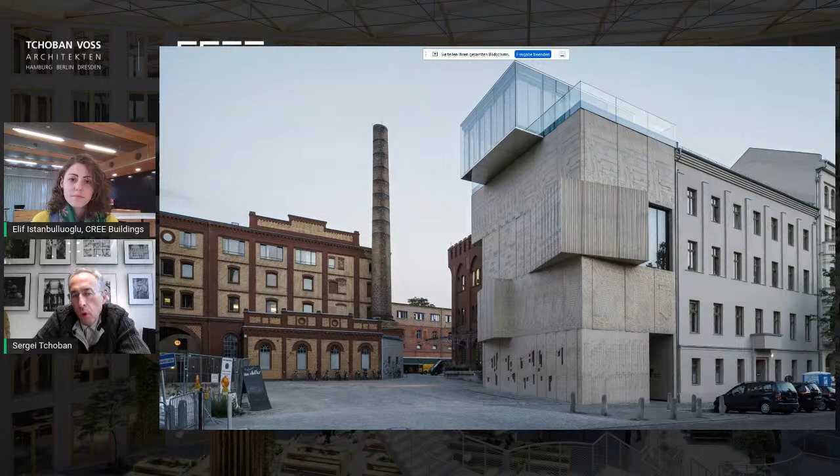But before that, I'd like to introduce some other buildings, maybe you know one or other of them. For example, the nhow Hotel along the Spree River - the hotel is already maybe 10 years old and still quite an interesting, iconic building along the Spree in the east part. On the other side is a museum of architectural drawing, small but quite nice, with a load-bearing concrete structure and matrices made of surfaces with drawings, the roots of drawings, as you can see also inside. The museum is dedicated to architectural drawing and architectural illustration.

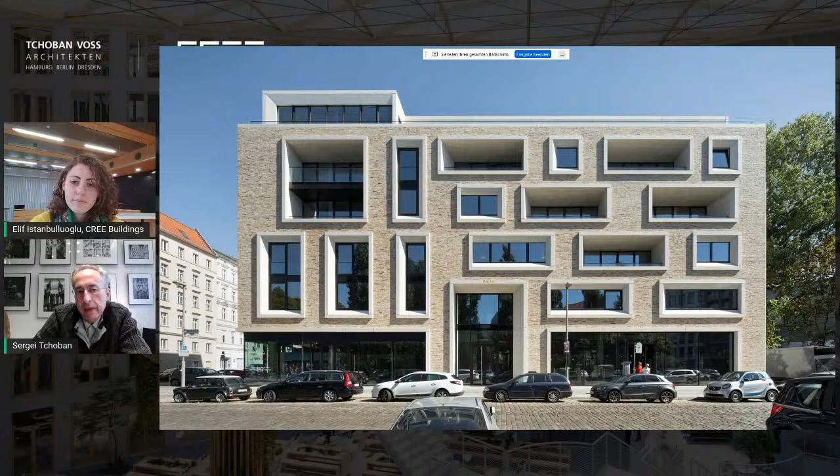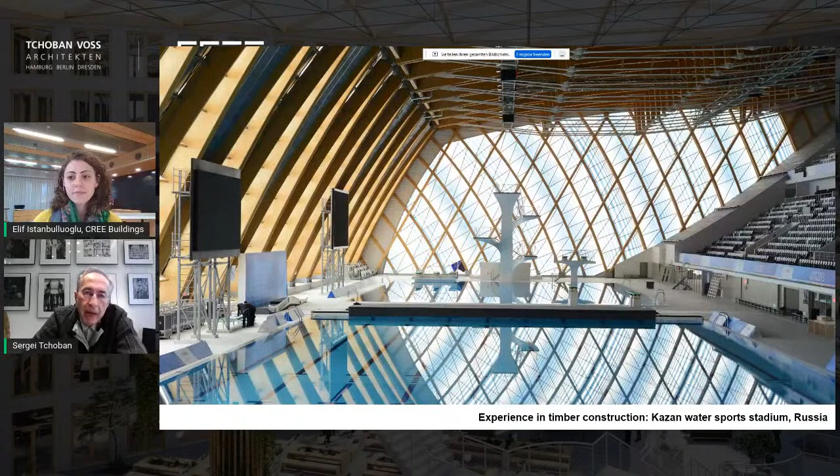And then some samples already made with timber. That's a big aquatic sports stadium in Kazan, made for the Universiade, international big games, in 2013 in downtown Kazan in Tatarstan, Russia. There we made the frames 70 meters long, with timber construction, laminated timber construction, and steel elements.

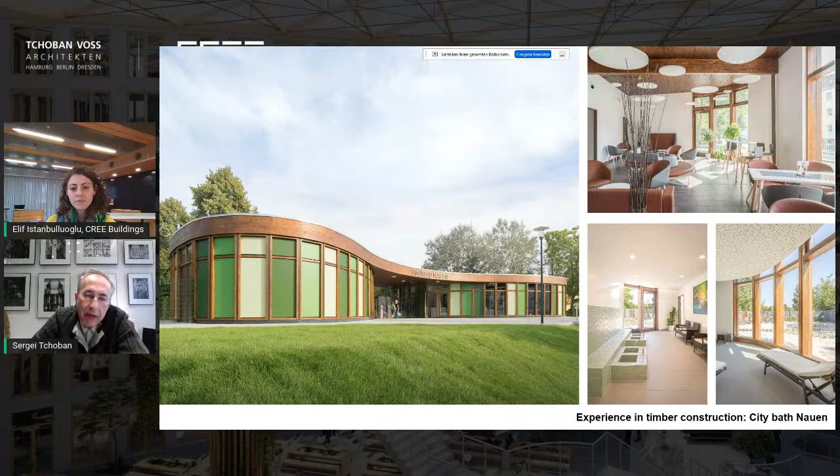For universalization of timber construction, on the other side is a building in Nauen, a public swimming pool, made completely with prefabricated frames made of timber.

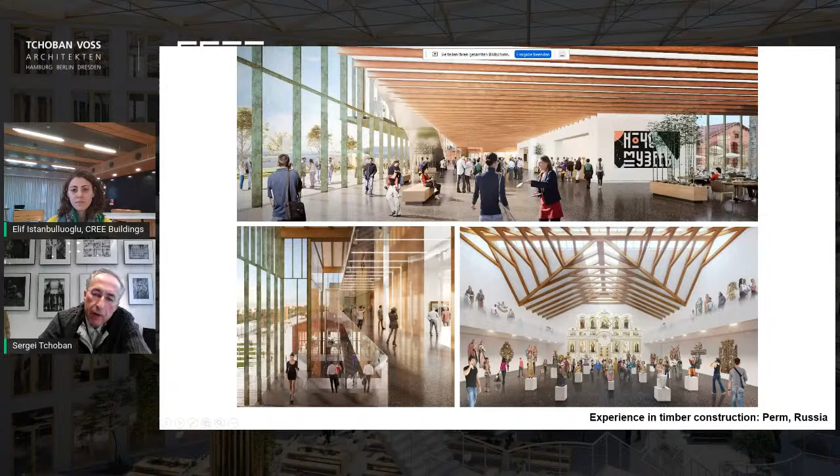So now I come closer to the building we make in Berlin together with CREE. In fact, there is a big central office for Vattenfall, who is responsible for energy delivering in the big area of Berlin, and it is nearby the Südkreuz railway station, a very important logistic hub in Schöneberg, one of the big districts of Berlin, in the south of Berlin downtown.

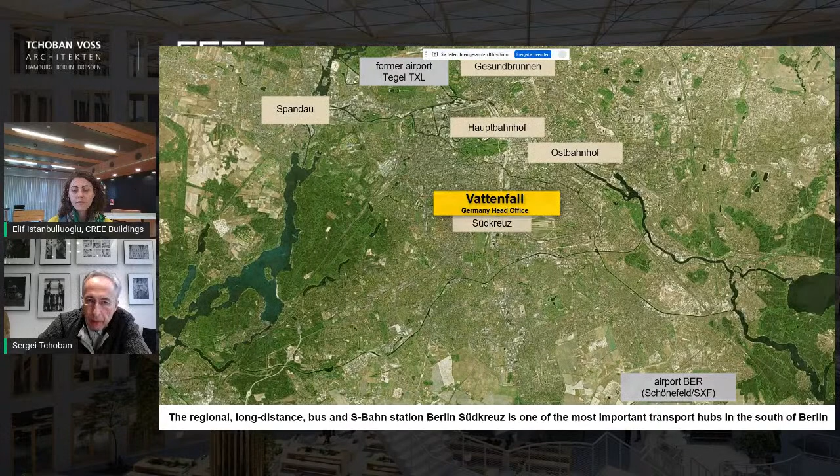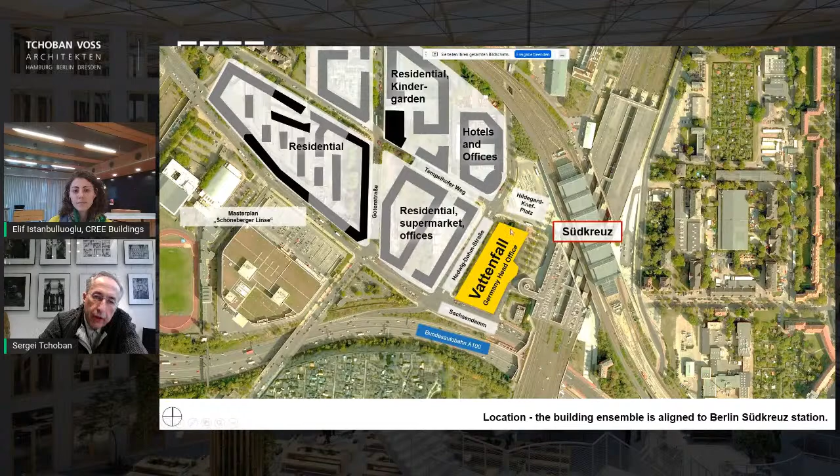It has a square, and around the square two buildings. So here we have a big square, Hildegard Knef Square, and along it we have two buildings, and the big one has really a very impressive atrium, made also with timber construction, and you come into this atrium exactly from the main square.

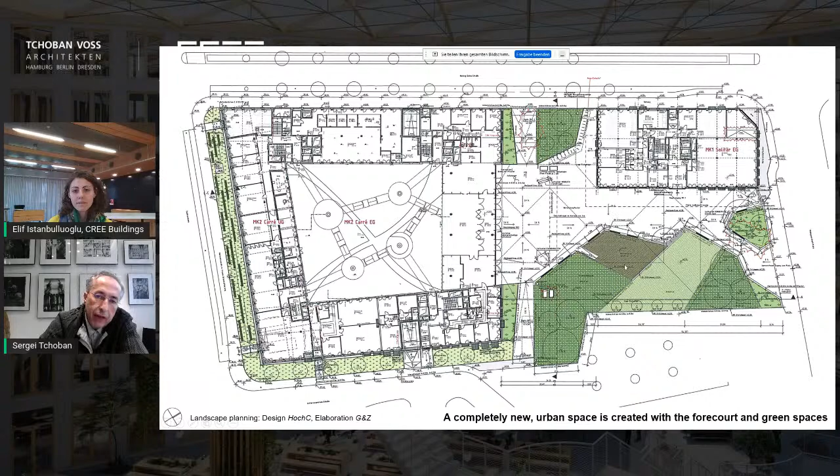So why a timber building? We make this development with our client EDGE, and EDGE is not only a very important client from Netherlands and now Germany, but it is also a very important developer for green systems of office buildings, very famous for that already in many countries. So here it was also a very important key point to speak about green building, DGNB Platinum certified, and as a sample, wood hybrid construction as a core point of the whole development.

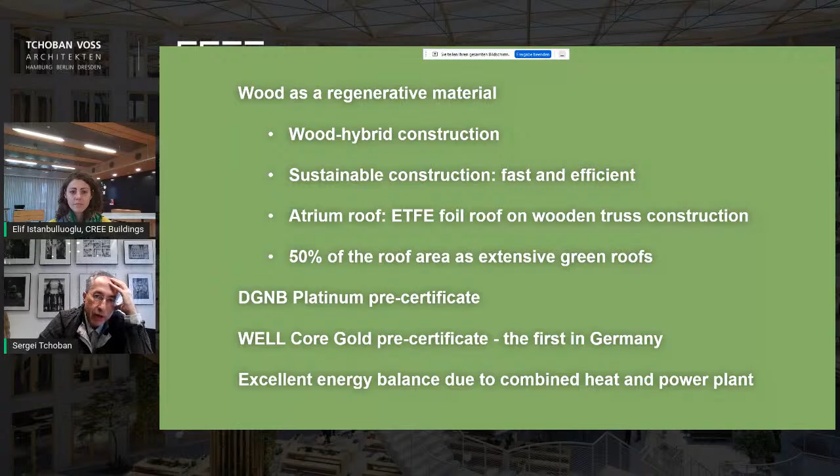I must say we began to do that just from the beginning of our project development. Nearly from the beginning, we knew that the CREE system is very interesting, because there are many systems we research and use, but the CREE system, from the logistic point, from prefabrication, but also from the aesthetic point, I found personally very important, because you see the beams in the interior, you see the columns in the interior, you see timber interior and timber construction as a very important part of the building. It's not only that everybody explains to you that it is timber, but you don't see timber because it is covered by white finishing - here you really see timber as beam and column construction in the interior, which I found very interesting.

Even outside, we will see big timber construction in the loggia. On the facade, we weren't allowed to make it in timber at that time, because the rules then - and even now - are quite strong about using timber on the outline of the facade. But as I said, you will see the entrance to the very big atrium, where you see wooden trees standing inside, and you will see this big loggia made by timber construction, which speaks of timber as a main element in the building.

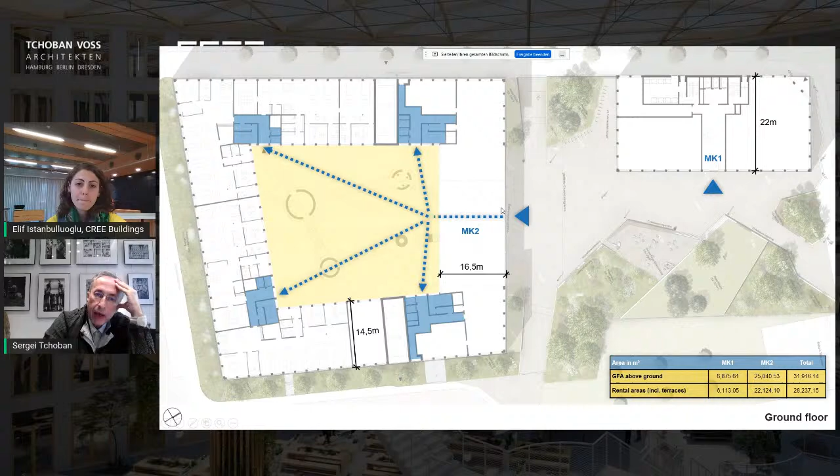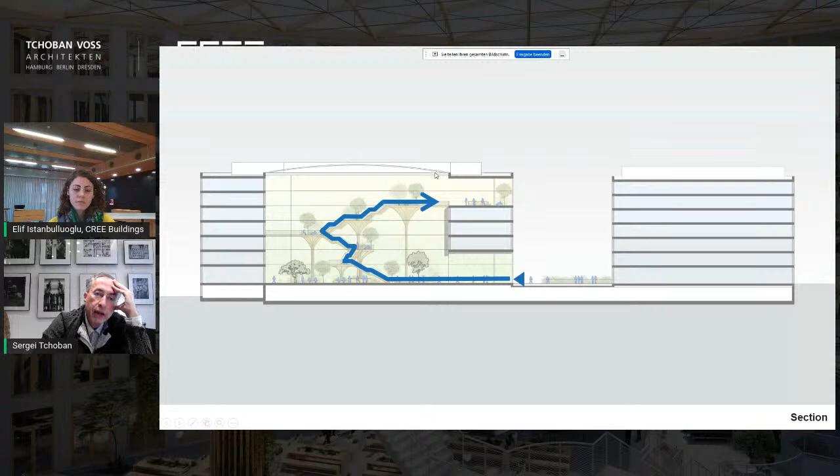You come into the atrium, in fact, from the square, and you have the possibility to go over all elements and levels of the building, over these trees, with platforms, with a possibility to drink coffee, to meet somebody, to speak, to discuss in these half open, half closed conference spaces that come out to the loggia, as I explained just before. And all that under a wooden and steel hybrid construction roof.

With very good acoustic quality also, because it's not glass, it is plastic elements, which are very good for sun protection, but also for acoustic reasons.

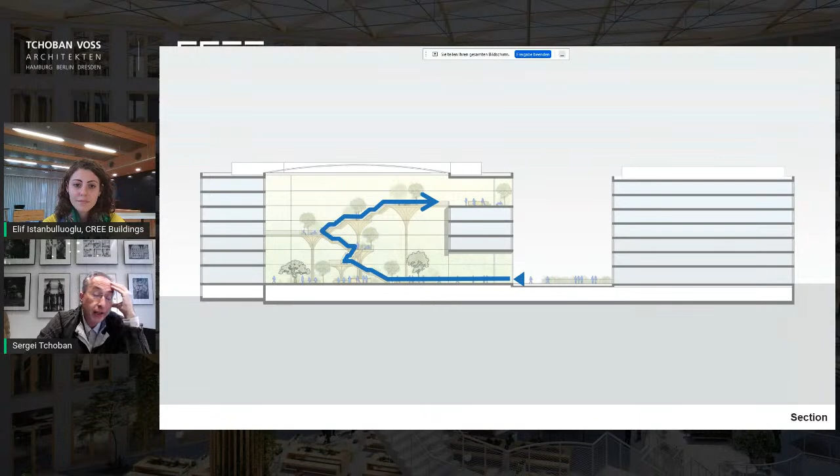So the atrium is the main point for connection of people. I hope the times of Corona are soon over forever, and then the connection in office buildings will be the main point of attraction in any office building. This atrium will play this big role in connecting all people together within the Vattenfall complex.

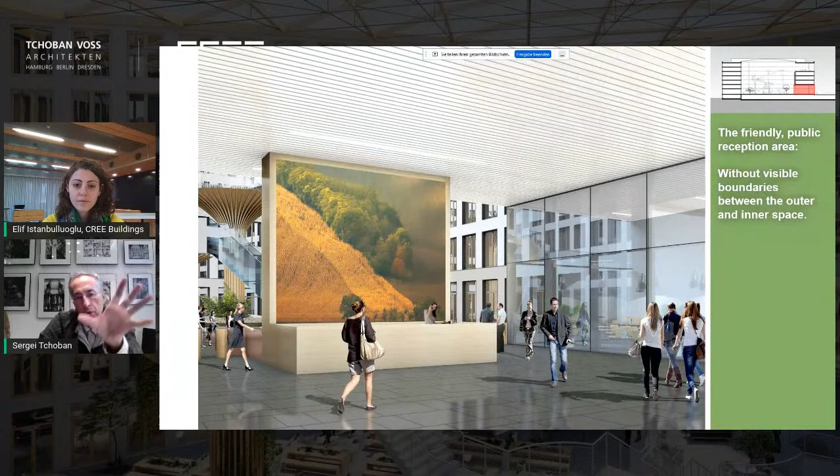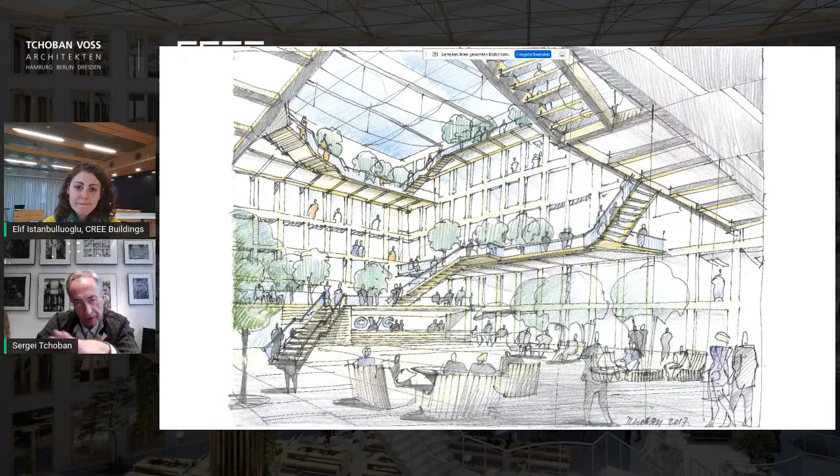You come in through the entrance lobby and go inside into the main lobby. All windows are also made by wood, and for the construction inside of the atrium, I decided to make different variants. The idea was every time the same: to have different levels where people are going over and connecting each other across different levels, as a big team, as a big society, a community inside Vattenfall.

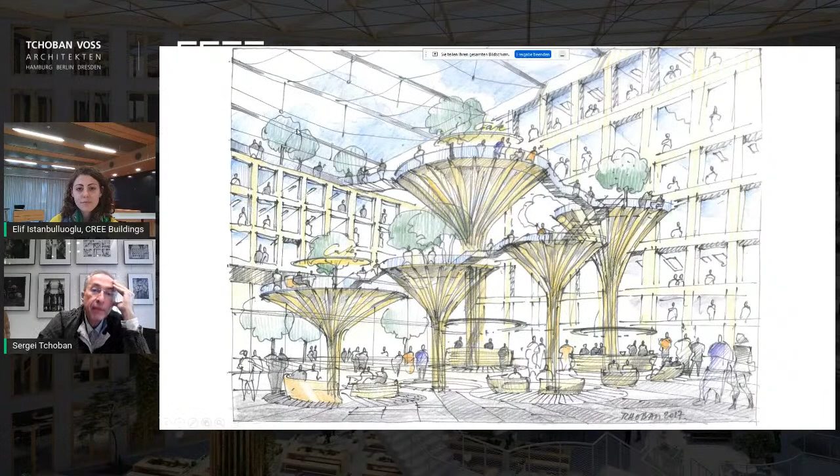At least this idea was chosen with wooden trees, and in fact now it is nearly ready. I have seen just today very impressive photos from the finishing, from the cladding of wooden construction along the trees, with the steel bridges of staircases and the bridges.

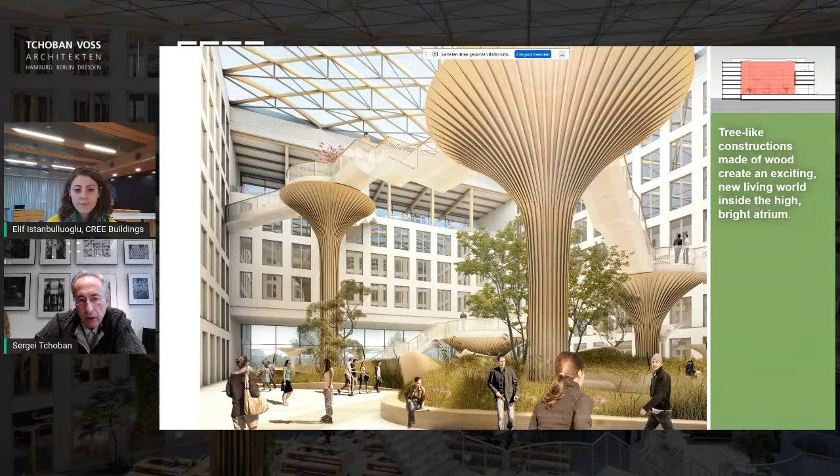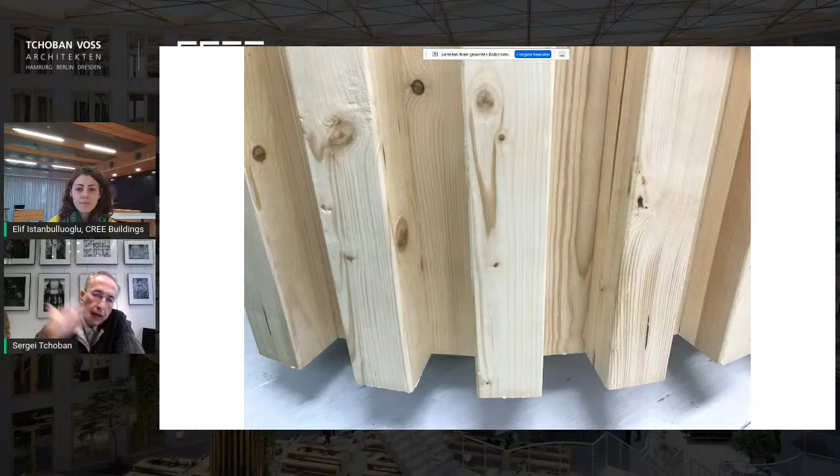So you can come, in fact, in every floor, in every entrance hall and elevator hall, from every level, but also you can come on the terrace level and see from inside as well as from outside this pergola construction made by timber. You can see, of course, in every interior the beams and columns made also by timber. That is a sample of finishing of these columns, like big trees or mushrooms, standing in the atrium.

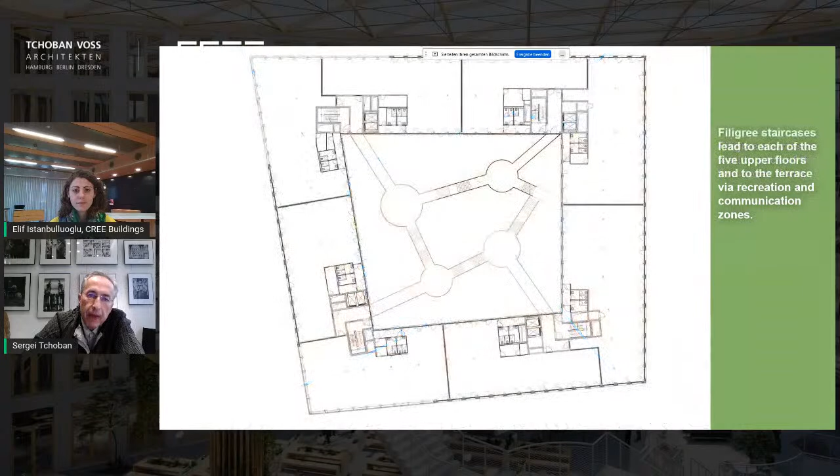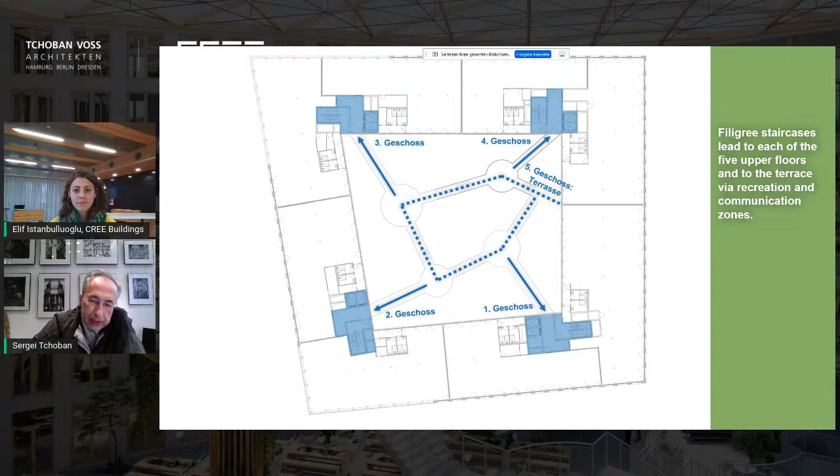So you go over these platforms for communication on every floor and can decide how you go, by foot or with elevators, and how you organize your time on the terrace on the 5th floor. That is the idea: you are by every entrance hall of every floor with these sky bridges of trees.

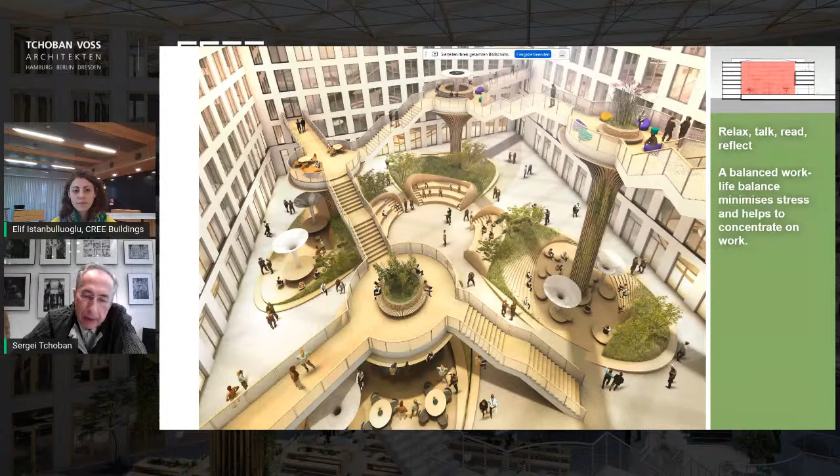How it looks from upstairs, you begin at the ground floor. You have at the ground floor also the big gastronomic area for employees, and also conference spaces, and then you move yourself upstairs and can meet other people in the floors or on the platforms.

So wood hybrid construction brings a lot, as we know. It's saving time because it's a pre-constructed and prefabricated system. The elements with 2 windows and 3 columns are coming already on site, and also parts of the ceilings come also prefabricated on site, and are brought over each other.

So you see really truly how your floors are built one over each other. That is very, very important. It brings, of course, a lot of ecological aspects, because wood gets CO2 from the air already during its life cycle, and after that, if it is built in, you measure this life cycle against your production cycles. So from the beginning it is a very ecological material, wood, timber.

And on the other side, it gives the possibility, just by the CREE system, to integrate these smart ceilings inside of the wooden construction. So you see wood, but at the same time you see also all smart modular elements for air conditioning, for lighting, for acoustics, and so on.

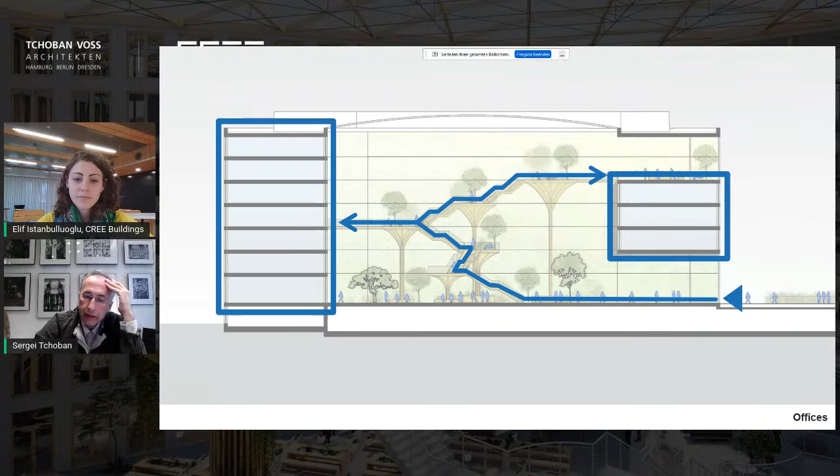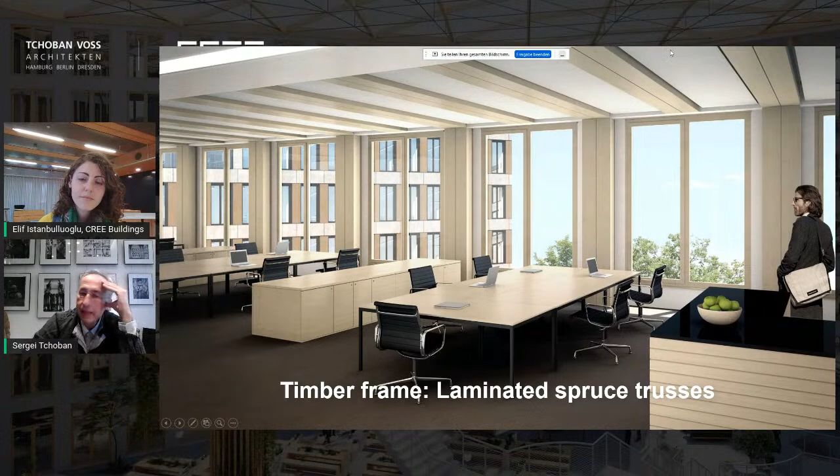Also, the windows are made by timber, and these smart ceiling elements are integrated between timber beams. So, in fact, you see like a Venice ceiling. You see timber elements in a very nice rhythmic system, and also columns, but in between you have all your MEP elements for creating a nice atmosphere in the building.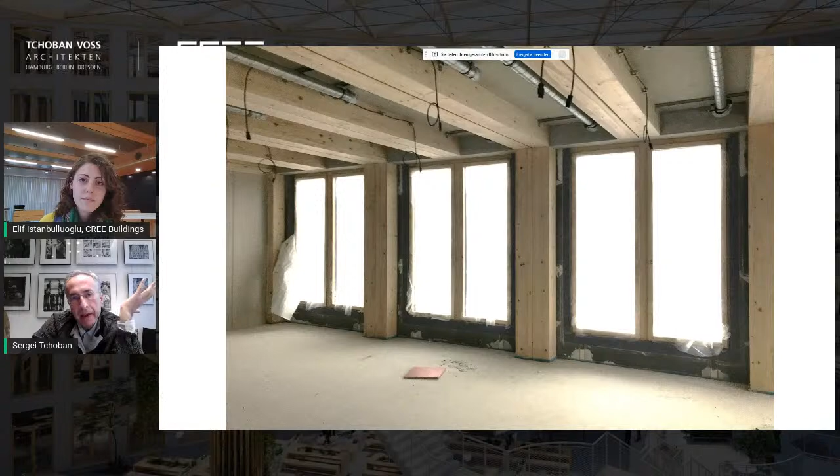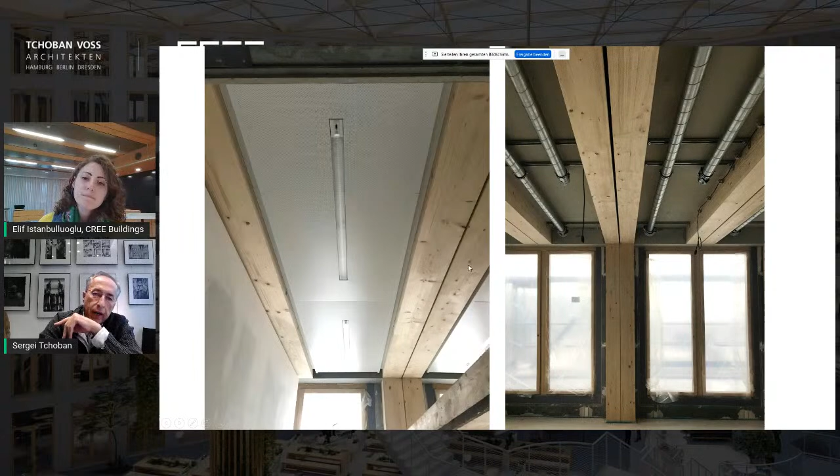Here you see how the smart ceiling would be integrated. The media tubes come from the floor area. The floor area middle part would normally be made by concrete, and this prefabricated timber system goes on the middle part and creates the load-bearing structure in the middle. From that middle part, the media go inside of two beams, and then the smart ceiling element comes inside.

So that is the connection between the column. In this case, we had to make a concrete element because we are on the first floor, where we need a little bit more load-bearing quality. But normally, as I told already, timber columns, timber beams, and a concrete round element along the whole building, where the timber beams come inside.

So that is the idea: you have columns by timber, you have beams by timber, you have here a concrete element, and you have here also a concrete element only 10 centimeters, connecting the timber and bringing them to a T-form element of ceiling.

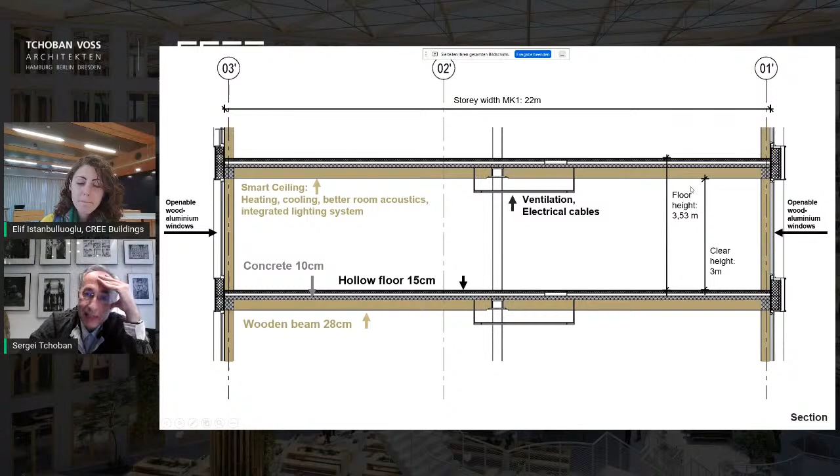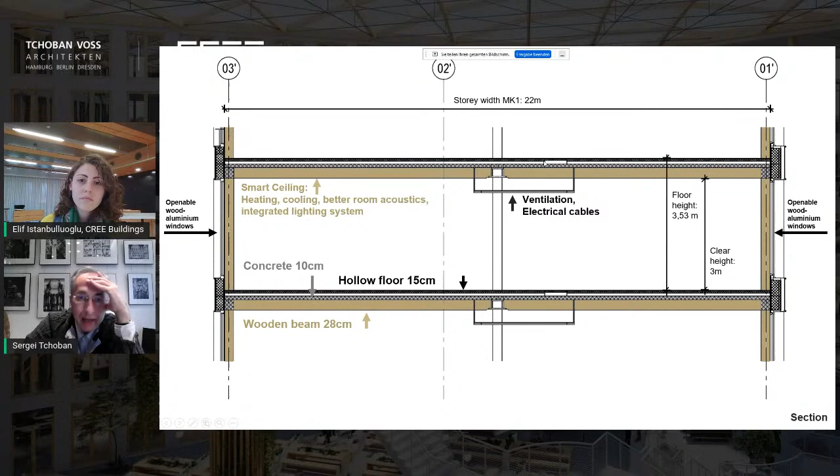So you have 28 centimeters of timber and 10 centimeters of concrete, so 38 centimeters together, and we have a very nice beam and flat construction over every floor. In the middle, as I told already, you have this central communication coming then left and right to the smart ceilings.

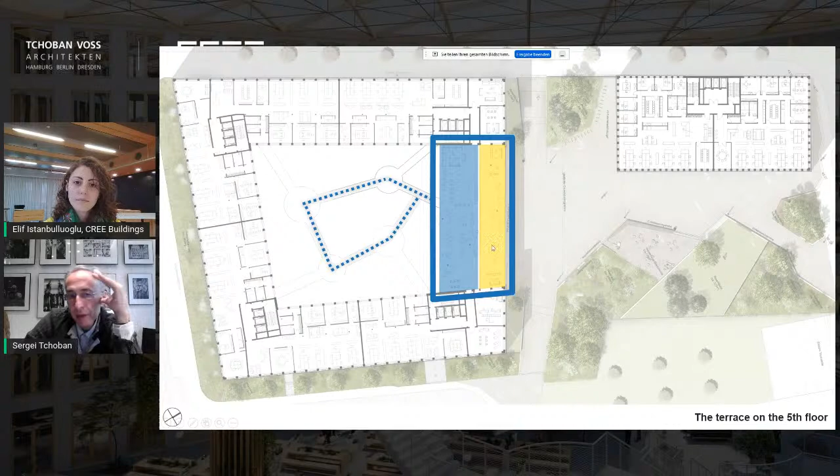The terrace on the 5th floor is a very important public level, made completely of timber. As the upper floor, you come here and you are in the warm or in the cold part, dependent on the weather. You see this timber construction also from outside, so it's really like a big poster of the whole building, visible from the square, from the railway station, and so on.

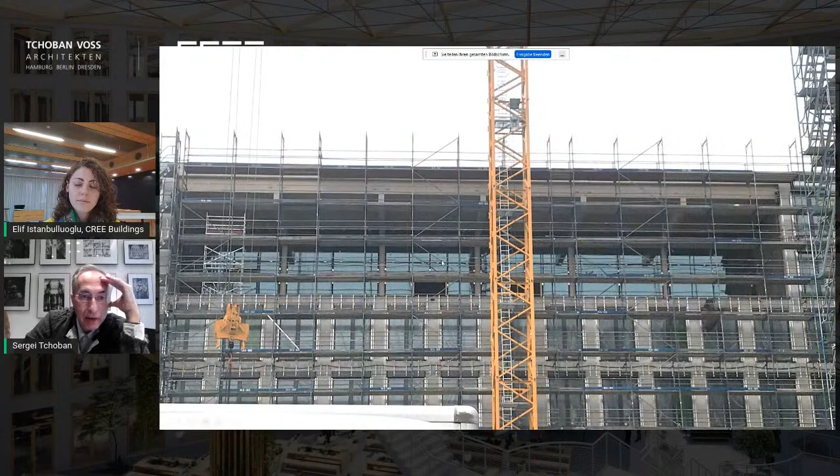That is already the step of the construction we are over, we are much longer already, and you see already the whole facade. But those were pictures from the winter, late winter, and you see already the timber construction coming out by the loggia. That is what we see already now.

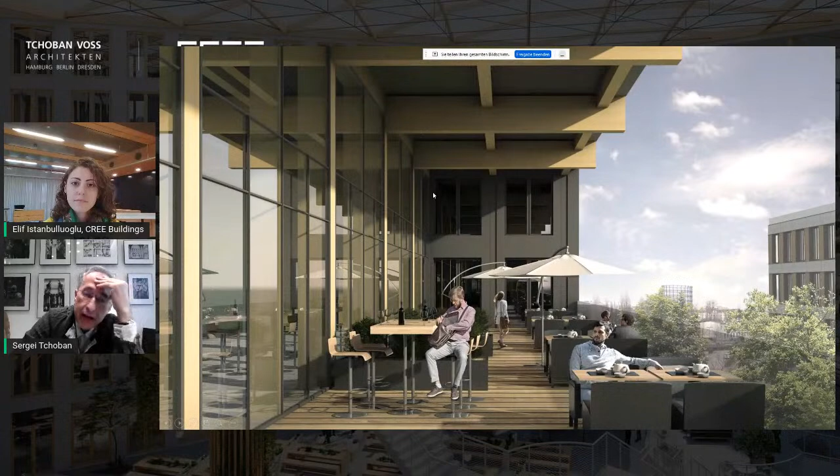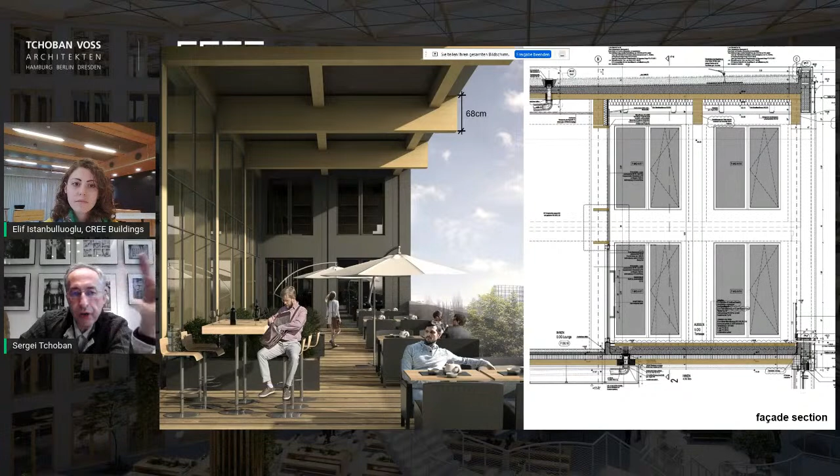It is still rendering, but we see in reality nearly the same. On the terrace you see like a wooden pergola, and also here in the construction all these timber elements are coming out and creating like a grid in the interior-exterior of a loggia. That is the idea of how it looks out.

I must say that the aesthetic of timber brings our relationship to the dimension of construction in another direction. If before, for some years, we spoke every time about thinner and even thinner constructions, you shouldn't see any dimensions of the construction. The construction should go away, and you see just very minimalistic elements.

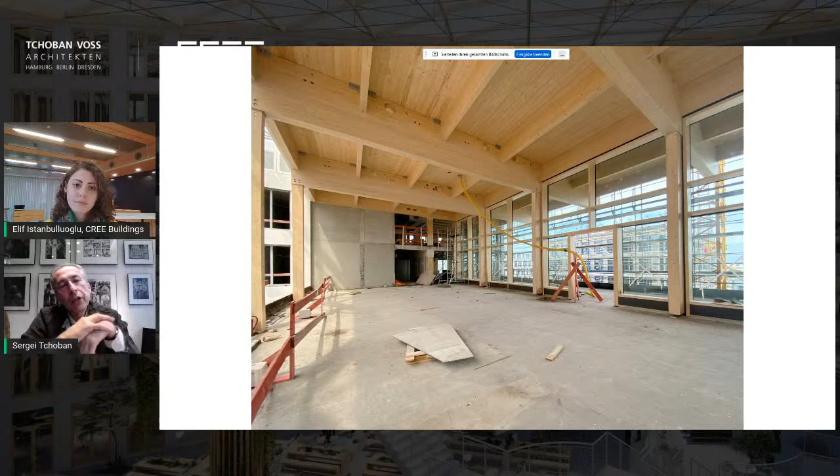So with wood, this is completely different. You see by wood the elements, the big sizes, and the quality of the sizes, the quality of surface, the quality of joining of these elements has its own aesthetic, and that is really a wonderful aesthetic from my point of view.

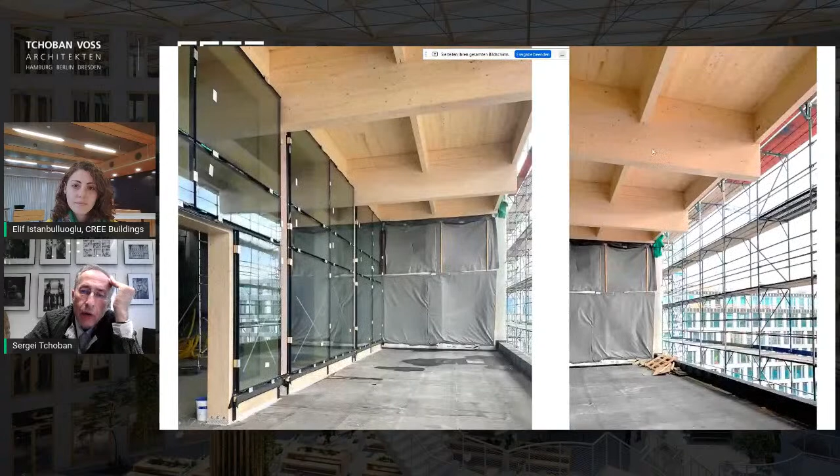Here you see the connection between timber elements and the timber under-construction for the windows. And here you see also many joints outside on the terrace, how it looks like now.

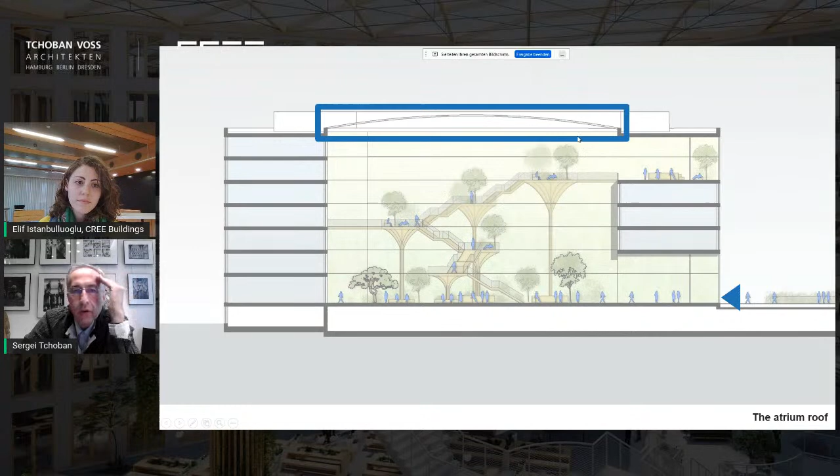The roof system is, in fact, an ETFE foil roof, as I told. These are plastic elements, but they are very good for acoustic reasons, and the air comes inside or outside of these elements, so you can create different parameters for your acoustic reasons.

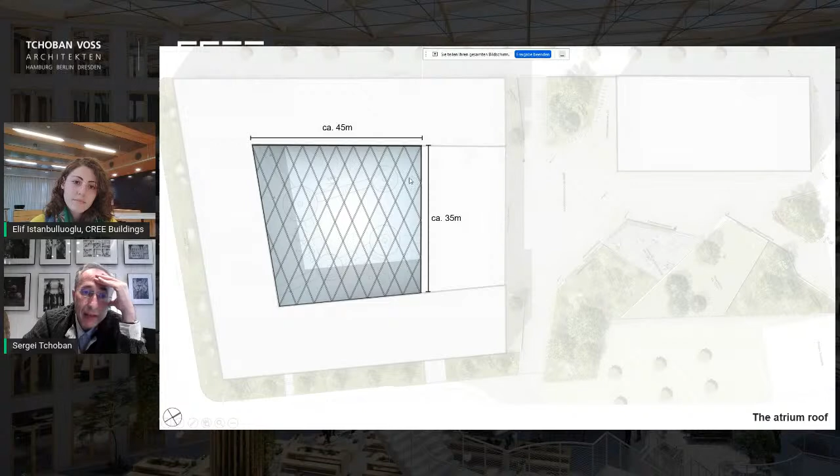And also for your sun protection reasons, it is a very nice system. You see it here together with the construction elements, so everyone has this form. There are 3 layers of every element, and with the air pressure you can bring 2 levels together, then your sun protection would be stronger, or you can bring all 3 levels into distance from each other with the air, and then more sun or more light will come through.

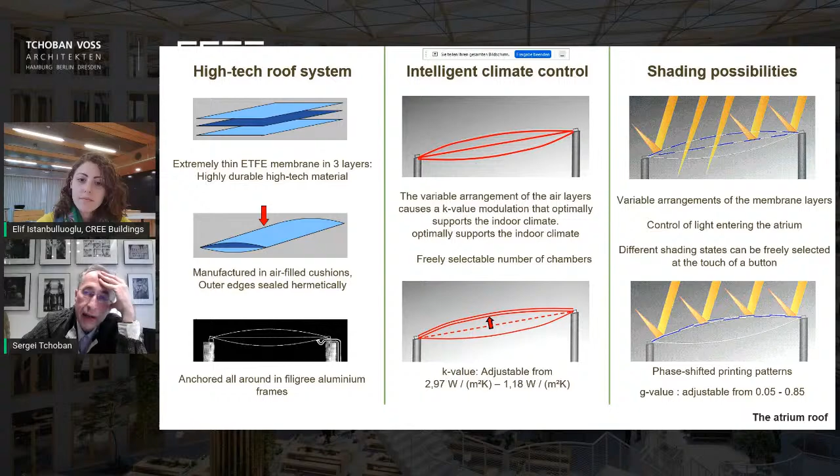So you can create different systems of sun protection, and we have created very good acoustic possibilities, because the surface of this element is much softer than glass and gives much better conditions for cleaning and for acoustic reasons. That is the idea of how it looks like now.

That is a print and sun protection of the middle and upper level of these Teflon elements. And here you see wooden construction, and here you see steel constructions underneath the wood, so this is a combined wood and steel construction.

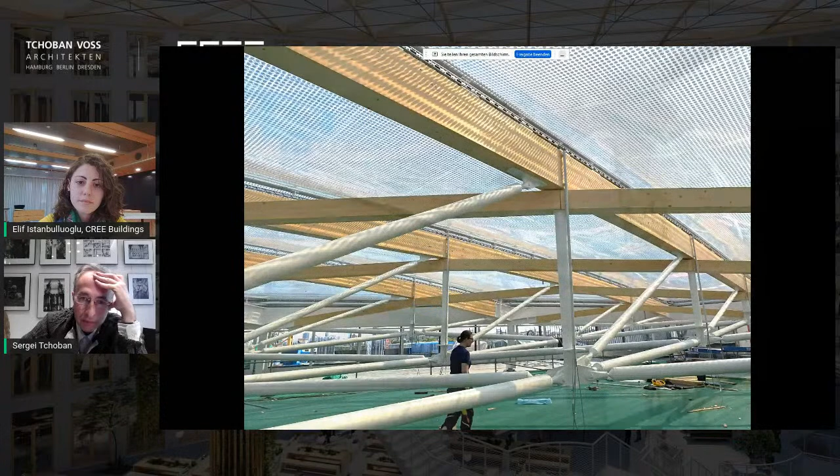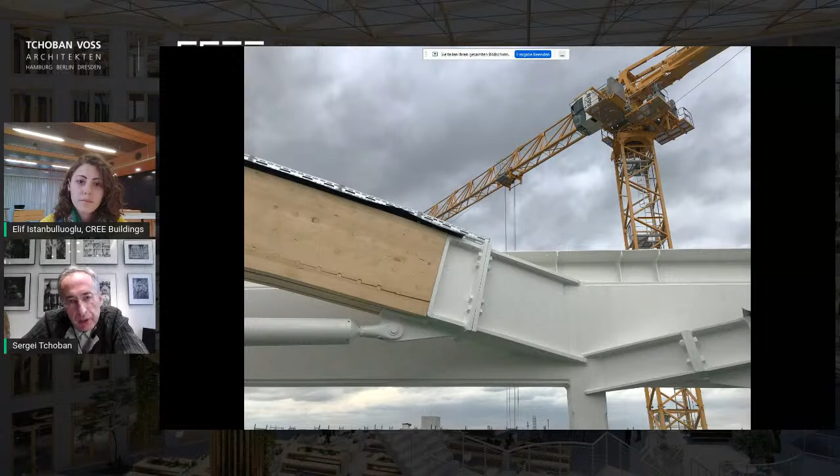Here you see how it was brought on the construction site. It was created downstairs on the ground floor and brought then with the crane to the upper floor. And how it looks like now, together with the timber construction of the pergola on the fifth floor with the loggia outside.

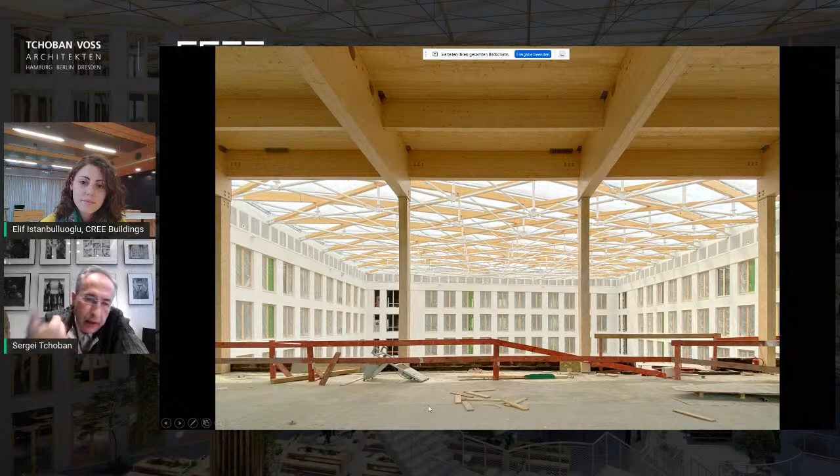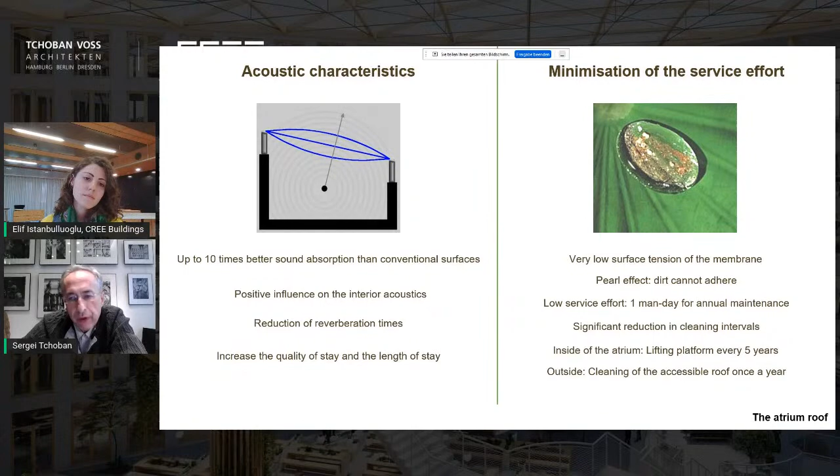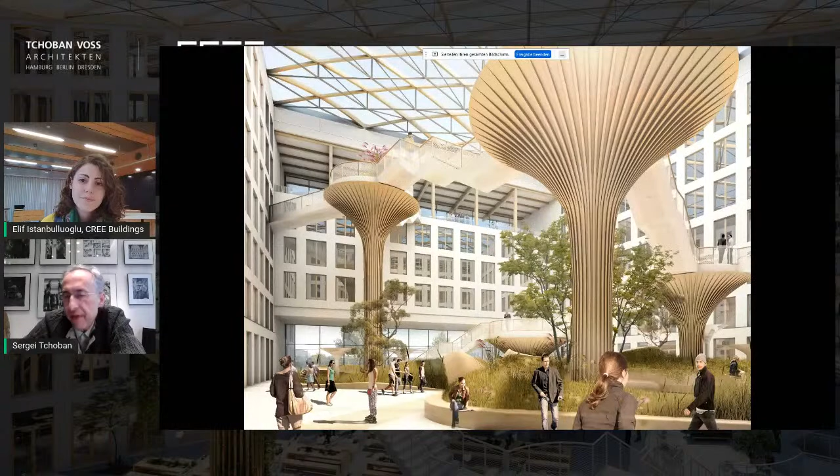As I told already, acoustic characteristics and minimization of service efforts by cleaning are also good points for this type of atrium roof, made not by glass. That is this roof, but altogether wooden windows, pergola, wooden trees, wooden timber construction of roof, altogether bring the feeling of a very warm and really very nice and outstanding atmosphere in the whole building, and also in the middle point in the atrium.

Also outside, as I told, these wooden elements are a big point where you see it is made inside by wood. You come in and you see all the reflections of the timber construction.